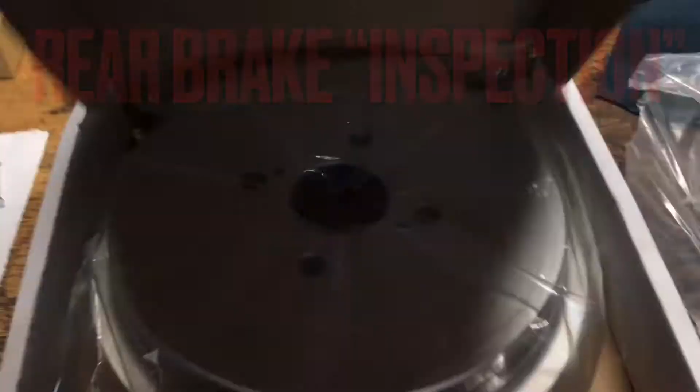Let me be clear right from the get-go, guys: this actually turned out to be more of a rear brake inspection than a complete replacement, because I didn't need to replace the springs or shoes since they're like brand new. So I don't want to waste anybody's time. If you're interested in seeing a full rear brake job, go watch something else, no offense. But I just couldn't in good conscience change parts that were practically brand new. However, I do endeavor to do things right. I'm only an amateur mechanic, but I try to do what I can, so there might be a few things here worth watching, I hope.

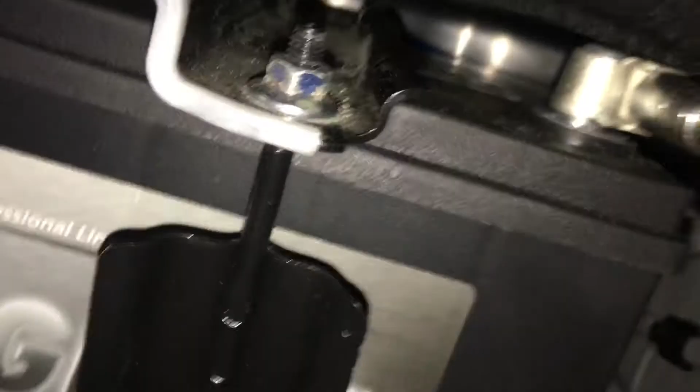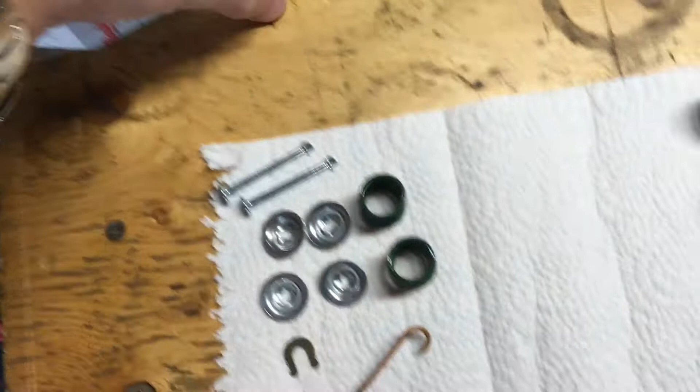So there's the kit part number. Before you get anything, cross-check that you have all the parts. Put a center line, make sure everything's symmetrical. These two springs here are the only ones that appear to be sided, and if you don't have a symmetrical layout, something's missing.

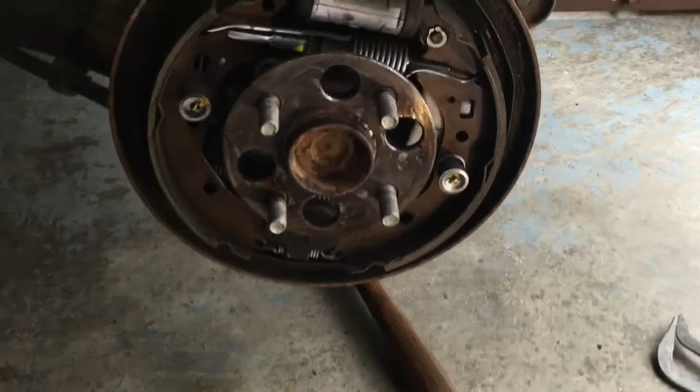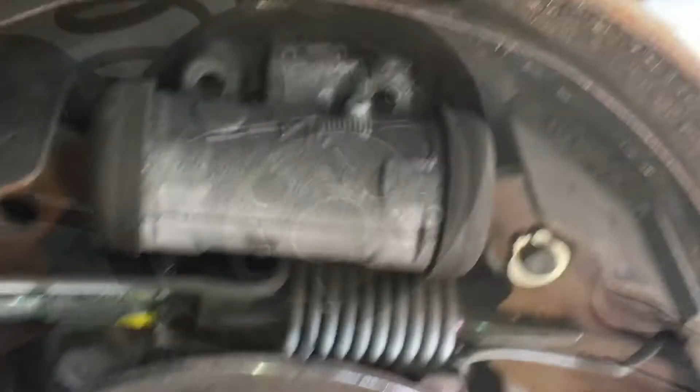I'm sorry guys, I'm not going to get the opportunity to show you the shoe and spring kit change, because everything in here is like brand new. As you can see by the thickness of the shoes there, very close to the original, very little wear. It's really pointless to change these. However, I am going to change my drums for the simple reason that there's a lot of corrosion starting to set in on the side, and I don't want it rubbing on the top here.

That can get annoying. So I just cleaned everything up and lubed the contact points. As you can see, I've cleaned the hub and applied some anti-seize. Again, being in Canada, the drums can easily seize, so this is just to try and avoid that. Sorry, a wee bit anticlimactic.